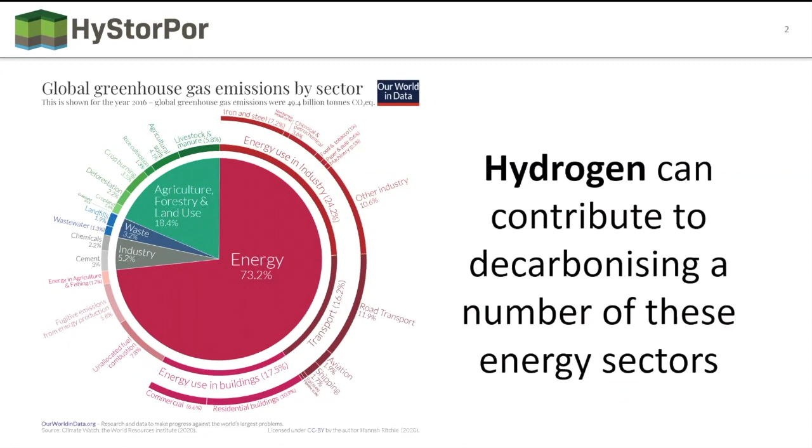So if we look at just our current production of hydrogen, we have various different types of hydrogen, and I'm sure you all know this. We have our grey hydrogen, which is the one that we're more familiar with, and that's from hydrocarbons. So it's steam reformation or any of these other alternatives of extracting hydrogen from hydrocarbons. The problem with that is that it produces a lot of CO2. I think you get about 7 times as much CO2 as you do hydrogen from a lot of these processes. So it's not really a low carbon alternative as it currently stands.

For it to move forward, we're going to really need to either combine that with CCS and capture that CO2, or of course the other alternative is to generate our hydrogen from renewable energy using electrolysis, and that's the true way forward that we're keen to explore, using our renewable energy. But at the moment, that's really only about 5% of the current world production. The rest of it is grey hydrogen from hydrocarbons. But this is something that will move forward in the future.

And actually, when I was getting ready for this presentation, I just wanted to know how much hydrogen was being produced at the moment, and I did an energy equivalent calculation. And so we're producing roughly just over 2,000 terawatt hours of energy in the hydrogen that we produce for ammonia and all the other industrial uses. And to put that in context, that's well in excess of the entire UK annual energy consumption, which is 1,660 terawatt hours. So actually we're already producing enough hydrogen to power the UK.

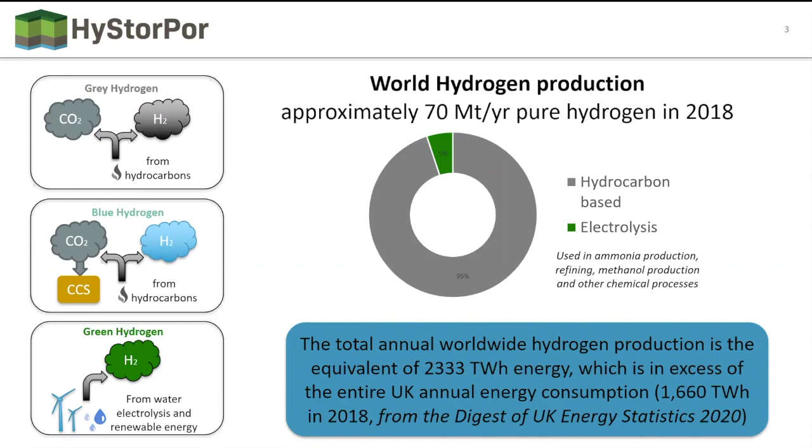So we're certainly looking at being able to upscale this existing production. So I thought it was interesting, and I hope you do too, that you're aware of that.

So the key with hydrogen, of course, is that it does have this high energy density by mass, and that's what makes it a very powerful kind of energy vector. But on the other side, it's got a very small mass by volume, which means that it's really quite challenging to store. And even when we liquefy it, its energy density doesn't come close to that of petrol or any sort of hydrocarbons.

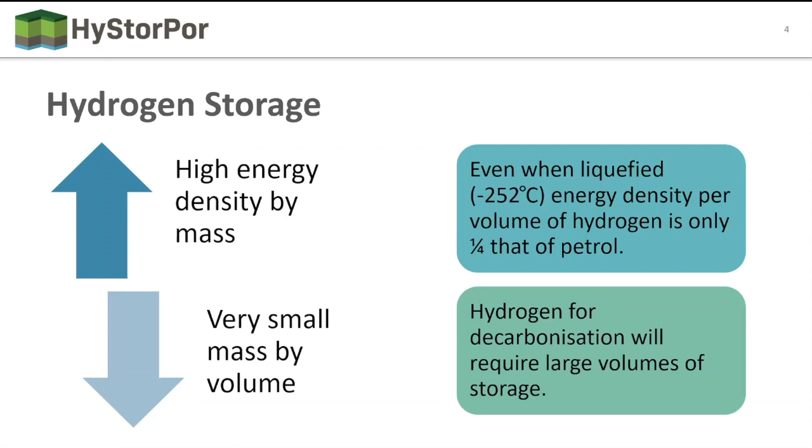So the key really is that for hydrogen, for decarbonisation, we're really going to require large volumes of storage, really large volumes of storage. And that's where the HyStorPor project comes in, because on the next slide you'll see really how much capacity the geological storage can provide in the story of hydrogen.

So I normally do this as a little quiz, but I thought I'd better keep it simple, but it's really important. I'm sorry, this is a little bit UK centric, but if we are to consider the scale of storage we need, if we take, for example, Scotland, which is where I'm from, and think about the amount of hydrogen that we need to just replace Scotland's heat. Now, I think most of you will know that Scotland's a pretty cold place, so we do use a lot of heating in the winter.

So this is just a sort of equivalent calculation for how much hydrogen storage we would need if we were to be able to store that entire amount to heat Scotland. So traditionally, a lot of our gas in the network is stored as line packing. You inflate the pressure of your pipe system, and you can store a little bit higher density gas.

So if we were to put that into our existing system to store that amount of hydrogen, we're going to need 2 million kilometers of pipe at standard 70 bar and 25 degrees centigrade. So that's quite a lot of pipe work to do any line packing. So that's not really a feasible option at the scales that we need.

We would also need 40,000 swimming pool sized tanks. Again, these are held at 100 bar and 25 degrees centigrade. So it's not impossible, but I'm not so sure people will want these sort of big surface tanks dotted around the country. So again, we're going to need 40,000 of those, which is a fair number.

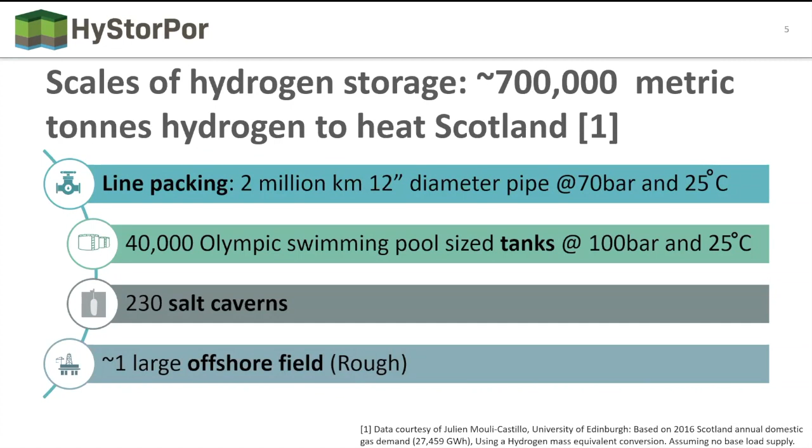Which brings me on to the HyStorPor project. So this is a project that's funded by the UK government. So they certainly have made a strong commitment to looking into the feasibility of hydrogen, and there's a large number of pilot projects underway in a number of countries across the world, all of which are feeding into this. And as we upscale it, people are starting to recognize more and more that the storage is at the moment one of the limiting factors.

So our goal really is to understand that geological storage. What we want to do is identify if, when we store the hydrogen in the subsurface, there are going to be any chemical or microbial reactions between the rocks, the fluids, the cushion gases, and the hydrogen that may compromise or damage the storage site in any way. So we really want to understand what's going to happen in the reservoir when the hydrogen is stored.

We also want to understand these flow processes. So to make sure that we can get out what we put in, and vice versa. So we want to understand whether any of the trapping mechanisms, the solubility, all of these aspects of how the hydrogen will flow within the subsurface, how it will migrate, how it will collect under the sealing rocks. So that's a really big important part of the HyStorPor project.

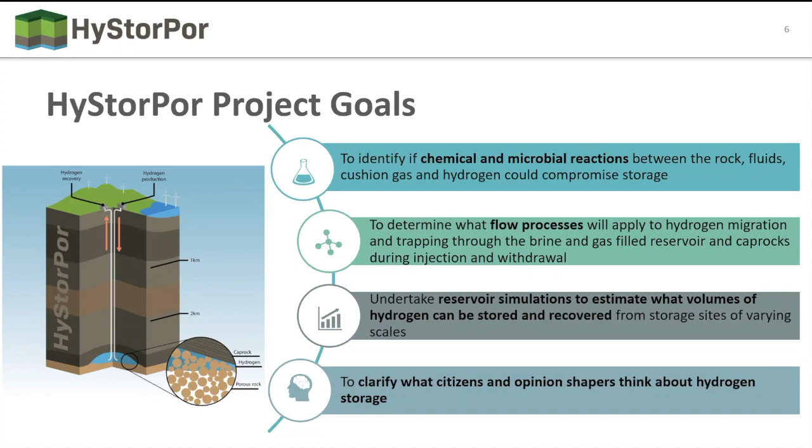So our project setup, we have a very engaged and rather fantastic advisory board. So the key really is those links between industry and ourselves and academia. Most of the people on our board are actively working within the hydrogen economy field, and it's important that we can make sure that there's a feed in of information between the two. So our advisory board are very valued members of the HyStorPor team.

And then the research itself is broken up into work packages, we call them, and each work package deals with one of those different goals. So we have one work package looking at the chemistry and the biology, one looking at the fluid flow, one looking at the reservoir simulation, and of course, one looking at the public and stakeholder understandings.

And we're trying to make sure that we anchor our research and our experiments and our modeling onto real sites and samples. And that's really where that industry link also comes in and becomes very important to make sure that we're making our research as applied and useful as possible.

And then, of course, we have our dissemination pathways to impact. So we're lucky to have SCCS, which is a dissemination and public stakeholder organisation based in Scotland. And they help us link between industry, government and researchers. Obviously, as academics, we're doing our papers and our workshops and talks like this one to disseminate our findings. And we also want to engage with the public and NGOs and policy makers as well.

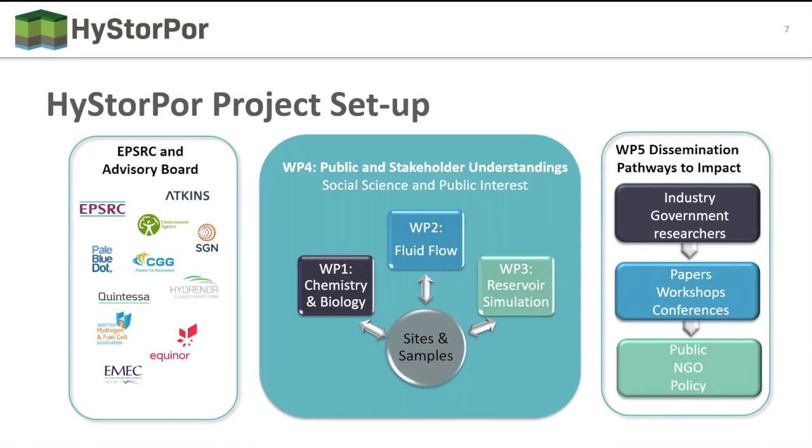So within work package 1, we have 3 different tasks. The first one is the microbial processes. Now I know Marcus gave a fantastic talk on that a couple of weeks ago. So anyone who saw that will be very familiar with what's happening there. So I won't repeat what Marcus has said, but I will highlight what we are finding. I'll present some of our thoughts on that and our findings from reviewing the subsurface conditions.

We're undertaking some experimental reactions of hydrogen with the rock and brine. So we're really just trying to develop equipment which basically recreates the conditions that we have in the subsurface, both in terms of pressure and temperature and stress. And then it gives us a window into what's happening, and we can see these reactions happening as they occur, and that gives us an idea of what happens.

And one of the important things when you're working experimentally is often the scale is very small. So what we really need to do is try to bring that up to either different time scales or different spatial scales. And one way of doing that is through upscaling into modeling. So a lot of work will be based on benchmarking our models against the experimental work so that we increase the confidence in our geochemical modeling, so that we really test the robustness of the existing modeling packages, so that we can be confident that the outputs from the modeling are representative of what's happening in these hydrogen storage reservoirs.

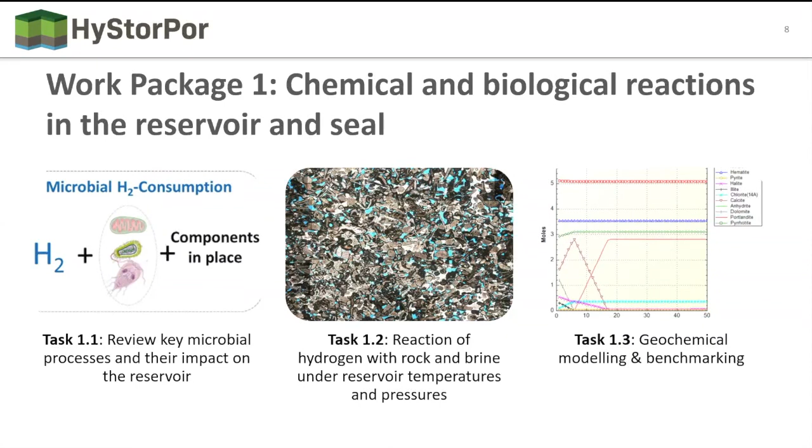So that's a really important thread of information: benchmarking experiments, and then trying to make sure the models are robust enough and then use them to answer the questions. So that's our first work package. So I'm just going to introduce you to some of the findings that we've had.

So of course, as Markus will have told you about, they're using it for a different purpose. They're using it for methane generation. Of course, in a hydrogen storage site, we don't really want to lose any of our hydrogen for methane. So we're sitting here in the opposite situation, in that we want to really minimize that production of methane, and we don't want to be losing any of our hydrogen. We want to minimize chances for consumption of hydrogen. We want to minimize any precipitation of iron sulfides or souring of any of our stored gas with hydrogen sulfide, or any of the microbial induced corrosion and biofilm blocking.

So these are the ideas that we want to understand, because all of these can impact on the reservoir. So biofilms can reduce our injectivity. As I say, we can contaminate our production gases. We can damage our topside facilities. So really, we need to get a handle on these microbial activities and make sure that we understand their limits, so that we can work within those limits. And it's understanding those limits of happy bugs, as I'll call it. If we understand where the bugs are happy and not happy, then maybe we can use that as a site selection tool.

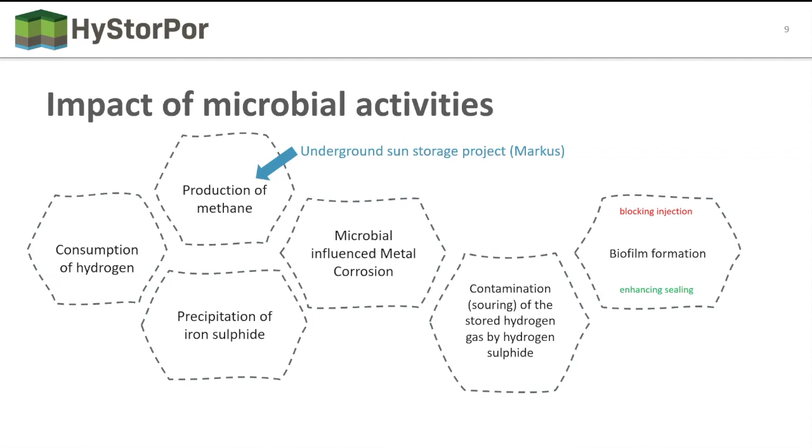So one of my colleagues at Edinburgh University, Eike, she's been doing some really excellent work on understanding these limits. So she's been assessing 3 major types of microorganisms that use hydrogen in the subsurface. So the methanogens, who like to eat hydrogen and produce methane. So that's the one that Markus will have been telling you about. The homoacetogens, I'm not very good as a biologist, so these produce acetate as a metabolic byproduct. And of course, we've got our sulfur species reducing microorganisms. And again, all of these either will contaminate or consume hydrogen, and we want to minimize those.

So I won't zoom in on the images, but the slides will be available for you if you're interested. But basically what Eike has done is gathered together the temperature ranges, the pH ranges, and the salinity ranges that these different microorganisms are comfortable in, that they grow under and they flourish, so that we can start to get a handle on these limits of where you see bugs who are thriving and bugs who are limited. So Eike's work has really discovered that there are limits in the salinity, in the temperature, and the pH that these bacteria are comfortable within.

So we know that, for example, at over 122 degrees, very few of the microorganisms are happy. So that means that if you've got a reservoir above that temperature, then you're going to inhibit some of that activity. pH, again, most of them prefer a pretty neutral pH. And then the salinity was the last area that we looked at. And anything above 5.8 molar of salinity or NaCl equivalent, then these bacteria are not going to be happy. So we now know where that sits.

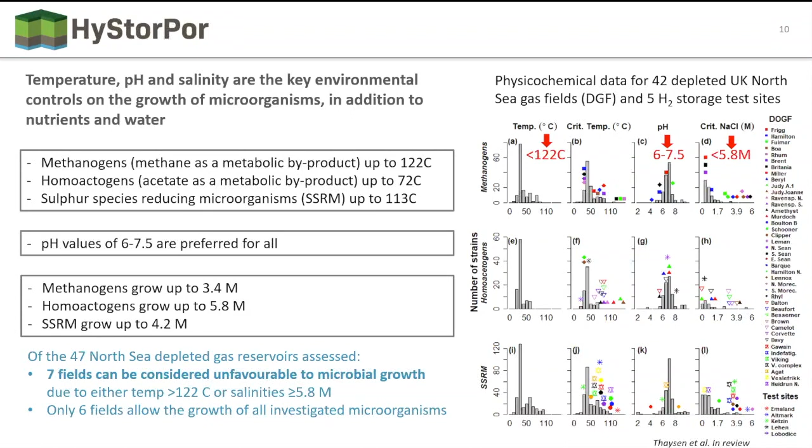So I think this is a really interesting piece of work that Eike has done, and we've just put a paper in for review. So hopefully you'll be able to get access to that information pretty quickly as it makes its way through the review process. And of course, what we can do with that information is understand these critical ranges of salinity and temperature, certainly the 2 that we've identified as the most important.

And then we can quite confidently at the moment say that storing hydrogen at temperatures above 120 degrees and in salinities of above 5.8 molar NaCl equivalent, you're definitely minimizing your bacterial activity. And we can almost use this as a site selection tool. So already we're seeing a good number of fields in the North Sea fall out with that range. So if you're going to choose one over the other, it's very sensible to choose one where your temperature and salinity are unfavorable.

We do recognise, and I don't know if Markus is online, that there's a limitation to our analysis because, of course, the data is based on cultivated species, and it's not based on hydrogen storage. It's based on ecology research. So we might not necessarily have data directly from hydrocarbon reservoirs, and that may change things. But certainly, our first pass estimate is that the indications are that we can use temperature and salinity as a site selection tool to optimize hydrogen storage and minimize those losses of hydrogen to microbiological activity. So that's definitely an interesting finding from the first year.

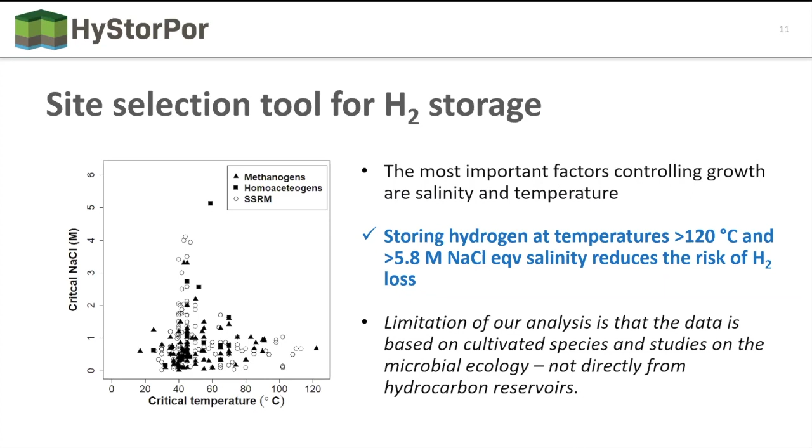So similar to the microbiology, we really want to get a handle on these reactions and the interreactions between them, so that if we can find reservoirs which don't have so much of this mineral, we minimize these risks. That's really what we're trying to do. So we're trying to identify the key reactions that are going to be detrimental, or indeed possibly ones that might help in the storage site. It's just another way of trying to screen and optimize our site selection and really understand these fundamental processes.

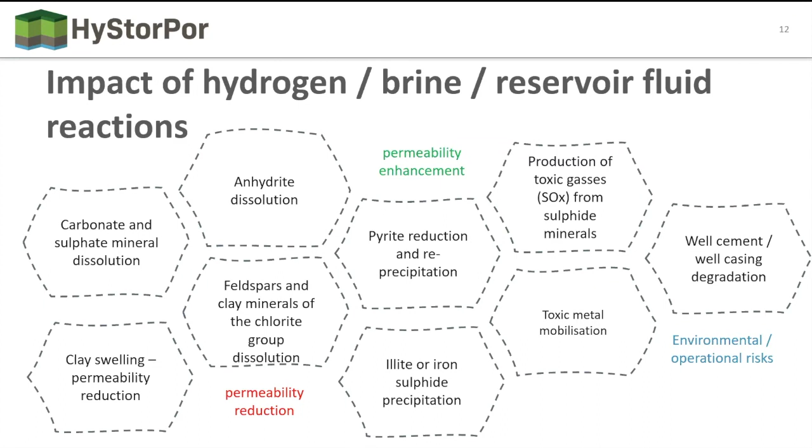So my colleague, again at Edinburgh University, Ali Hassan. Ali, your surname is too long. Ali's on the call, so you can ask him these questions later.

But certainly, Ali's built this fantastic set of experimental equipment, so we can run at reservoir temperatures, reservoir pressures, and a massive range of fluid and gas mixtures, particularly hydrogen. I know you had hydrogen up at about 55 megapascals in the lab, which luckily I wasn't there for, that can be a bit hairy, but it was all perfect, the equipment is sealing beautifully, and we're able to do these high pressure and temperature experiments to really get a handle on exactly what's happening.

And we can record the pressure and the temperature as they change. So if there's any gases being released that are changing the pressure, we can monitor that in situ. And then we can also undertake fluid chemistry and rock analysis. So we can really pick up any of these geochemical reactions that are happening within these pressure vessels. We are also developing some flow-through pressure vessels as well, because the vessels that you can see there are static reaction vessels, and in the second year we'll be developing more kinetic reactions as well.

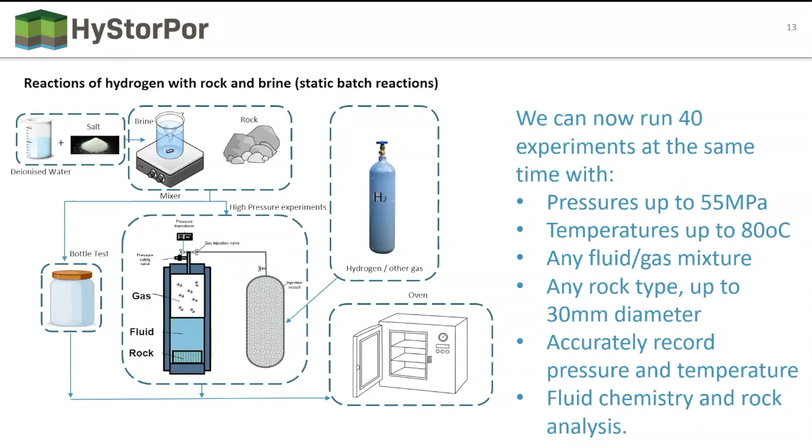But the batch experiments are really important for the benchmarking of the geochemistry software. So that's kind of one of the main drivers behind that. And like the bacteria we review, we have some early results.

Again, I'm sorry you probably can't see this slide very well, but at the moment we've really been developing and testing the equipment on quite generic sandstones to get our methodology right before we start using our very precious reservoir samples. So we've been using 3 different types of quite clean quartz reservoirs: Clashach, Penrith, and Fell sandstone. So these are quite traditional. I'm sure anyone who works in rock mechanics or petrophysics will be very familiar with these rock types.

So we've also been using them primarily because there's such a wide database on those. So having the knowledge of how they react with hydrogen can support that wide database that's already there. We do have access to real reservoir rock types with more complex mineralogy, so we really need to start looking at the pyrites and the calcites and the anhydrites, and these are ready to test moving forward.

Obviously COVID has closed the labs for a little while and slowed down our analysis, but we're doing our best, we're continuing on, and we have everything ready to go, and now we're operating at full reservoir temperature and pressure. And certainly in the experiments that we've done so far, which have been quite low pressures, up to 0.1 megapascal and at 50 degrees centigrade, so not huge pressures and temperatures, we certainly are not seeing any significant geochemical reactions. So our early indications are that there's certainly no showstoppers at the moment.

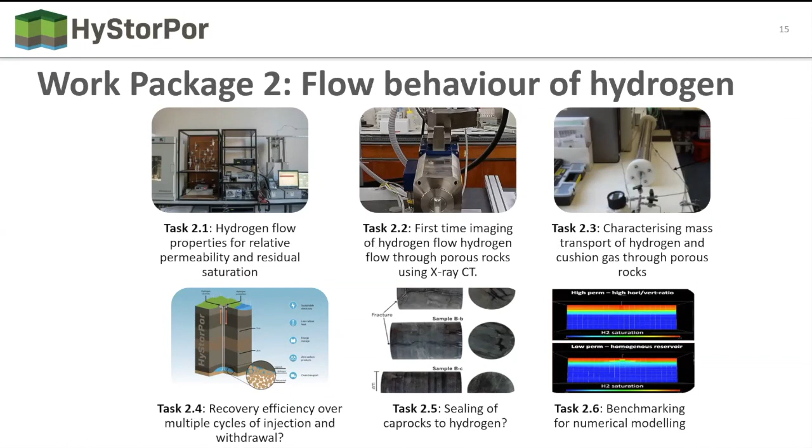So I'm just going to quickly talk through this wonderful thermodynamic model that my colleague Ali has built. There's a Nature paper published on this, and you can download this piece of software to do your own calculations. Basically, this is an online tool which will generate a very significant number of thermodynamic properties of hydrogen mixtures. So again, we were wanting to talk about a real reservoir where you've got existing natural gas in the reservoir. You may have cushion gases, so we're still keeping CO2 in there because we're hopeful. We've got nitrogen in there as well.

That online tool can calculate the density, viscosity, a whole range of thermodynamic properties at a range of mole fractions of hydrogen, from 10% hydrogen with 90% cushion gas to 90% hydrogen, all the way through. And that's very useful if you're talking about pipeline engineering or any of these things when you're mixing up the gas streams. We are working from pressures from 0.01 to 100 megapascals and temperatures from 200 to 500 Kelvin. So this is a really nice tool, which is freely available for anybody to use. I do recommend, if you need to calculate a gas stream mixture density, then this is your place to go.

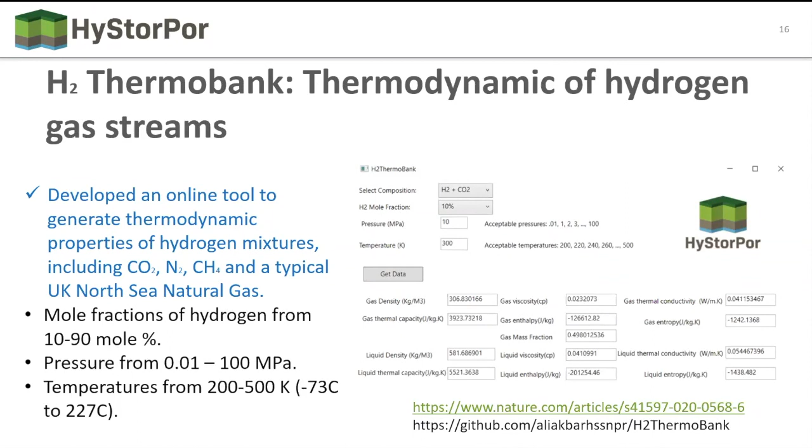So the reason why we've chosen the pressures and temperature ranges that we did is we did a quick study of the whole hydrogen system. We wanted to make sure that we were covering all of the temperatures and pressures that would be encountered, right from transmission and generation all the way through to the storage, because we wanted this tool to be as applicable to anybody working in hydrogen as possible. So this figure just gives you an indication of why we chose the pressures and the temperatures that we did.

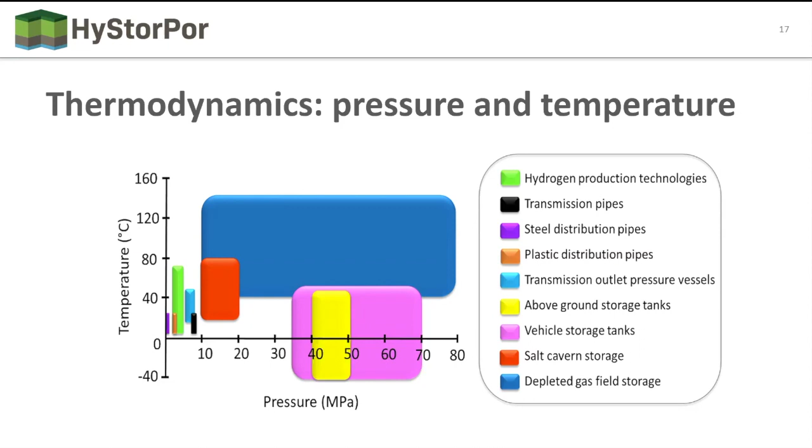So yeah, that's really that. I'm not going to go into the equations. If you want the equations, read the paper, it's fantastic. But essentially the Thermobank model uses the GERG-2008 equation of state, and that calculates the density and a range of other properties. Those then provide input for the SUPERTRAPP model, which allows the calculation of the viscosity and the thermal conductivity. And between those two methods, we can have the full list of thermophysical properties from the Thermobank.

And of course, the GERG equation of state is based on two sides of things. It's based on your ideal gas contribution into the equation of state, and it's also based on the residuals. So it's really each individual gas's contribution, which has to be fine-tuned and benchmarked through data sets. That full benchmarking process has been gone through for the GERG equation, so we have a high confidence in its applicability for the hydrogen system. That's something we can be very confident in using.

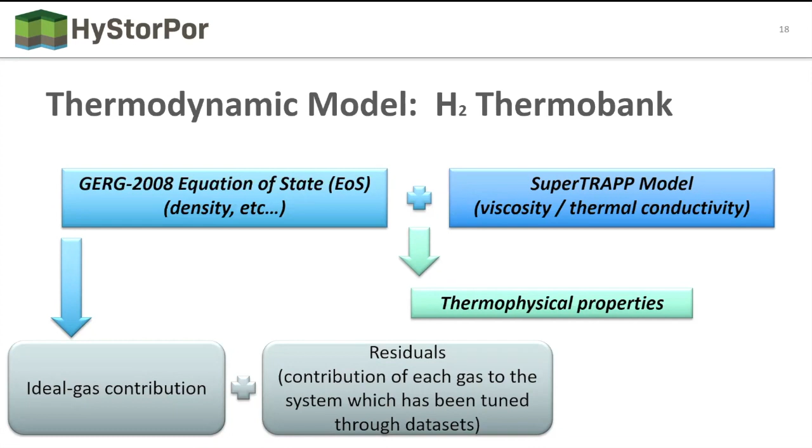So I just wanted to show you, sorry for the slides not being so easy to read, but hopefully you'll be able to peruse them at your leisure later when you get the slide pack. This is showing you some density plots over different pressure ranges for different molar fractions. There's an infinite number of combinations that you can output from this model, so this is just one output for different temperatures. The coloured lines reflect the different temperatures over the pressures for these different molar percents, and that can be generated for any of the properties. You get a table and a graphical output for that.

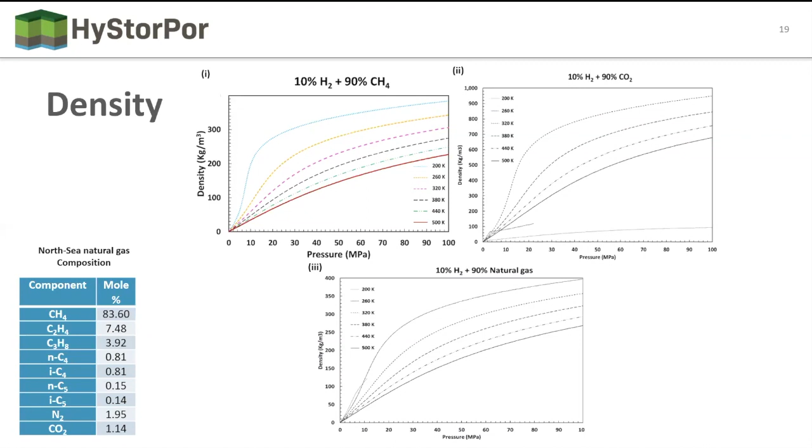What's important is that the model doesn't just deal with the gas phase; it also deals with the liquid and supercritical phases as well. In this image, we're just showing you the gas phase, which is why one of the lines on the top right-hand graph cuts off, because then it moves into its liquid phase. But the model is fully capable of dealing with the different phases that you encounter, and all that data is generated.

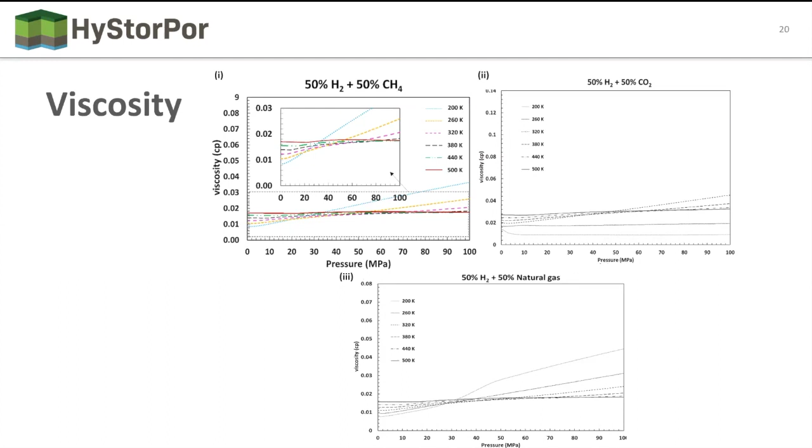The same for viscosity. This is another example of the viscosity outputs that you can get, so depending on what temperature range or what pressure you're working in, or how much percentage of mixing you have, you can gather this data very easily from this online tool that Ali's developed.

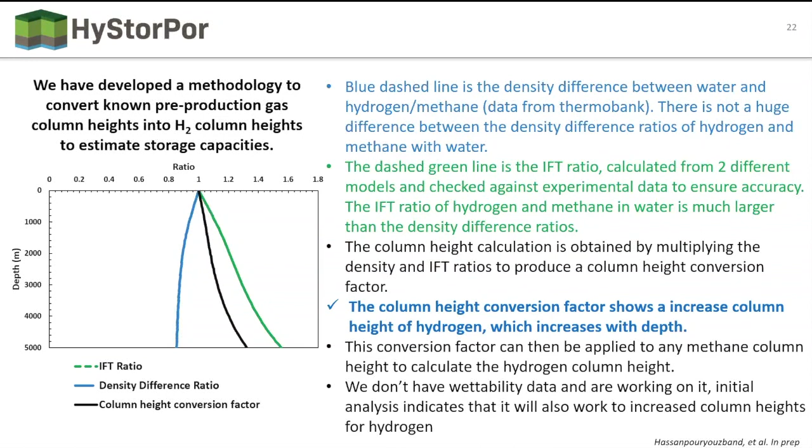So the one drawback of the model at the moment is that we don't have the wettability data, but we're working on that. And again, the early indications show that that's going to also work in the favour of increasing the column heights for hydrogen. So watch this space for that one.

And then our final work, well, not the final, but the work package where I'm going to talk through some of the data is our numerical simulation. So there's been some very exciting work on that. So we're wanting to really start to benchmark our experiments. We want to understand the impact of the cushion gas and the mixing. We want to look at optimizing the geological trapping structures. So we really don't understand how the geometry is going to impact the storage security.

Do we need a very steeply dipping anticline to really trap it, or will it take a wider one? We need to understand that sort of buoyant flow trapping geometry. So there'll be a lot of work on that. We also want to understand the integrity of the entire reservoir to these cycles of injection. So the production and injection probably on an annual basis. So we really need to understand the mechanics and the integrity of the caprock and anything else in the reservoir while we undergo these cycles.

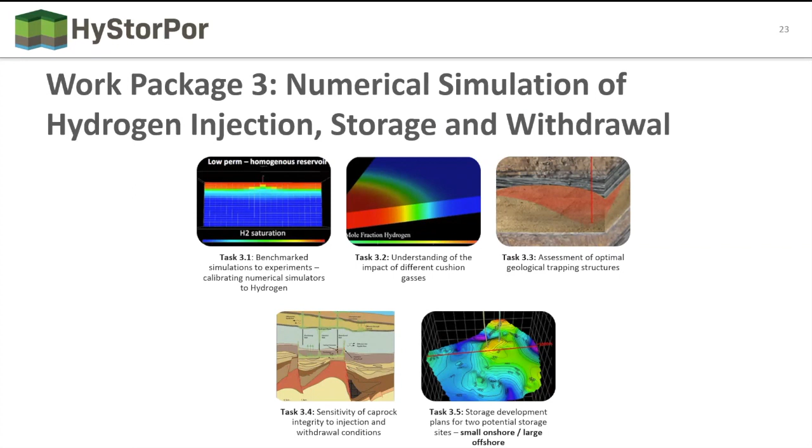And then, of course, we want to start looking at storage developments and understanding how we optimize a hydrogen storage site. So this work is just in its infancy, but there's a couple of examples that I can show you. I hope this works. Let's have a look. So hopefully you can now see a column moving. You can see the visualization.

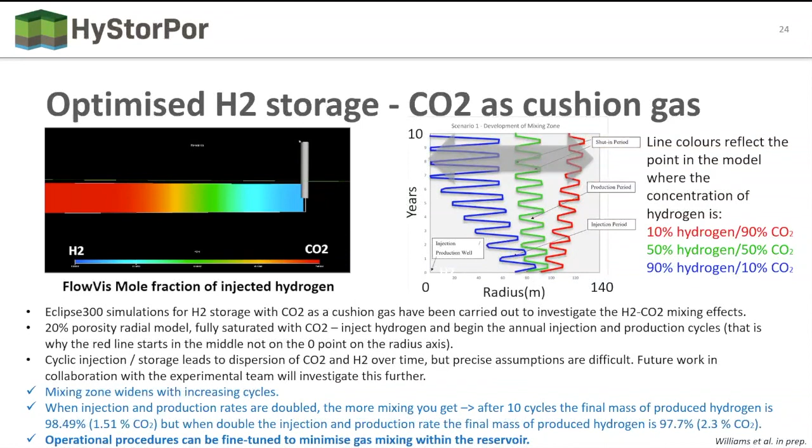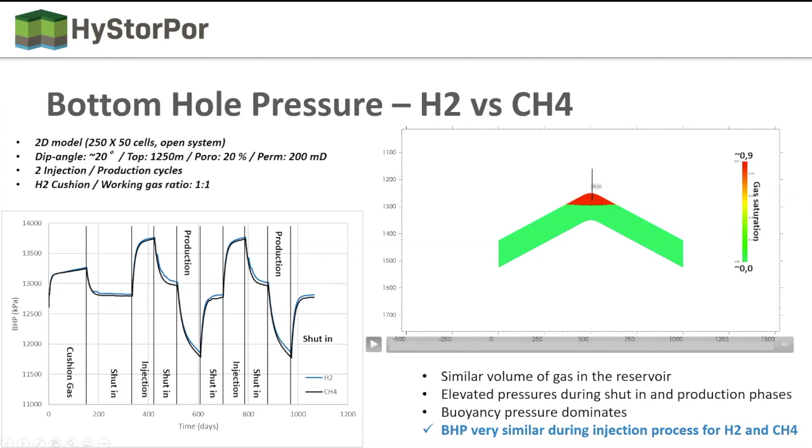So this model is running over 2 cycles of injection and production. And you can see the difference between the two, and really there's not that much difference. They're very similar. So you get slightly elevated pressures during shut-in and production phases. We've got buoyancy dominating, but the bottom hole pressure is very similar for hydrogen and methane. So again, this is work in progress that we'll be developing and we'll be looking to share with you as time goes by.

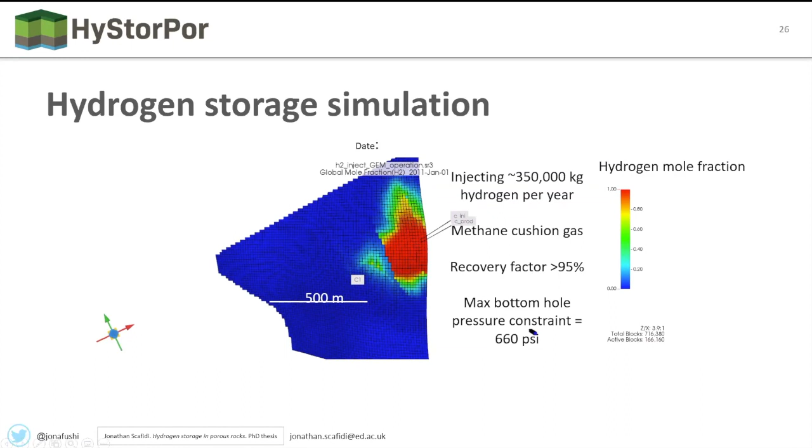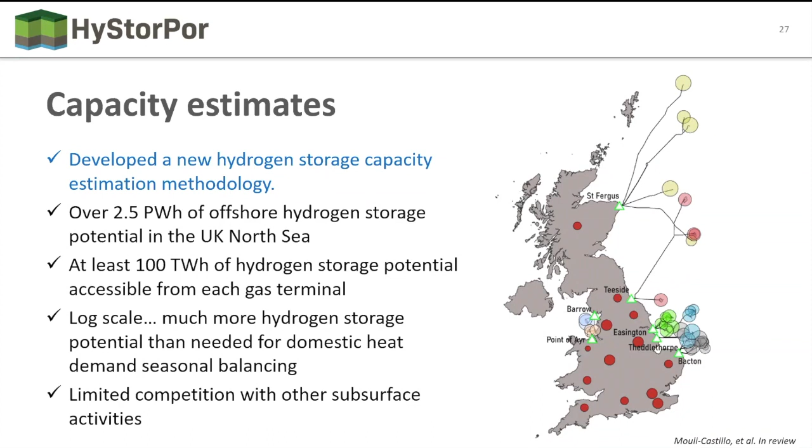So unfortunately, Work Package 4 hasn't made much progress because we haven't been able to go out and do our public stakeholder workshops. But that's something that we'll do as soon as we can get back in. But it is important, and it's definitely at the forefront of all of our research.

So to summarize, I'm sorry, I've maybe gone over time, sorry everyone, and I see there's questions, so thank you. But basically we think that there will be a biological site screening based on temperature and salinity, and we can choose sites that are less favourable to microbial growth. We don't see any significant geochemical reactions yet, but we've still got a bit of work to do. Our column height calculations indicate that hydrogen is going to have a higher column height than methane, and this is great. We have a high accuracy hydrogen mixture thermodynamic property estimation tool freely available for people to use.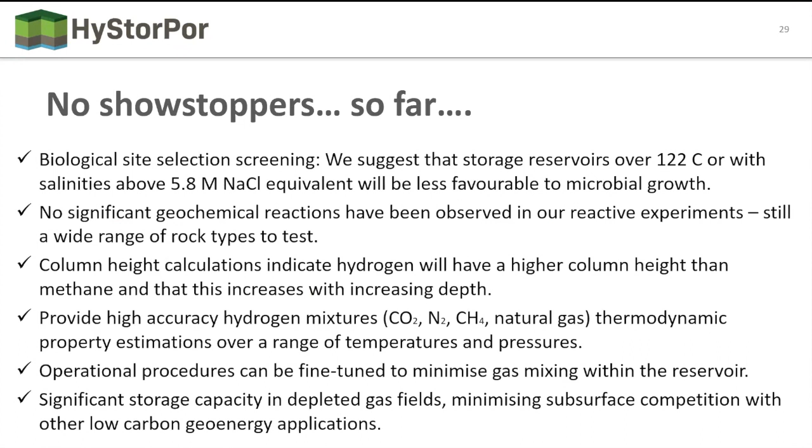Our early modelling is showing that operational procedures will be able to be fine-tuned to minimise our gas mixing and reduce hydrogen mixing and loss, and that we have significant storage capacity in depleted gas fields, more than we could possibly need. So we're minimising that subsurface competition with other low carbon geoenergy applications. So that's everything from me.